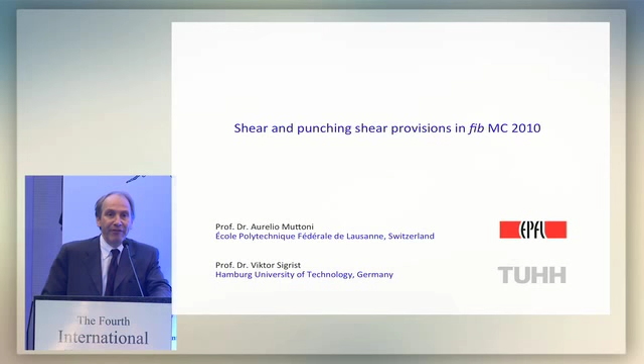A very short introduction about shear and punching shear provisions in the new model codes. Then Professor Viktor Sigrist from the Hamburg University of Technology, Germany, will continue on shear, and then I will talk a little bit about punching shear. Of course, the provisions for shear and punching shear are very much related. This is why we have combined our presentations.

We have many types of structures where shear problems can be governing. Typically, we know in a girder, in the web of a box girder or a girder with an open section, this is a typical region of our structure which has to be designed for shear. But there are also other structures which are perhaps a little bit less common, where shear can also be governing. Typically, a cut and cover tunnel, we have the slabs and the footings, where the loadings can be very important, and where we usually don't use shear reinforcement. And in these cases, shear can typically be governing. It has, or at least it has to be checked.

Another topic is what happens with flat slabs. Let's say slabs supported on columns. We know that in this particular structure, the shear forces are not parallel. We don't have a one-way slab. For instance, for the inner column, the shear forces are oriented toward the column. And in this case, we can have significant shear forces, and of course shear has to be checked. In this case, we speak about punching.

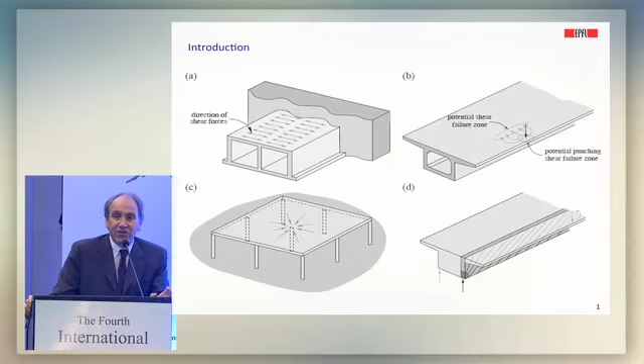We have then other cases where we can have both problems very related. Let's say, for instance, the deck slab of a bridge, which is subjected to concentrated loads. In this slab, we can have this zone between loading and the web, where shear can be governing, but we can also have the portion of the slab around the concentrated load, where we can potentially have a punching problem. Which means that when we speak about shear, we need to have provisions which are valid not only for this very classical case, but for all these cases. And these are just four examples. There are many other cases where we can have shear problems.

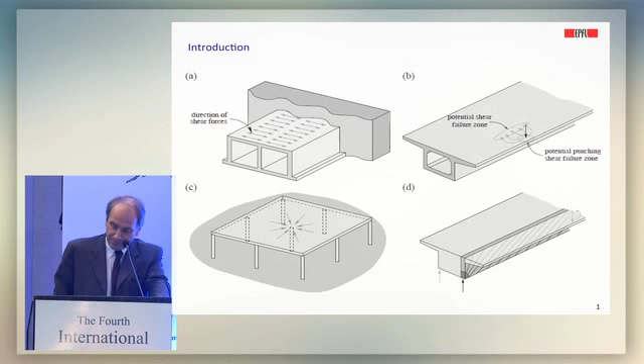We always have to make the distinction between shear of members without and with shear reinforcement. Why is this distinction important? The main reason is that the failure mode of members with and without shear reinforcement can be completely different. Here we can see a girder, let's say a beam, without stirrups, without shear reinforcement, and we have this typical failure mode, where we have a very high strain localization. Just before failure, one bending crack opens more than the others, and then it propagates into the compression zone, and at the end we have failure due to the large opening of this critical shear crack. This is what happens in beams without shear reinforcement.

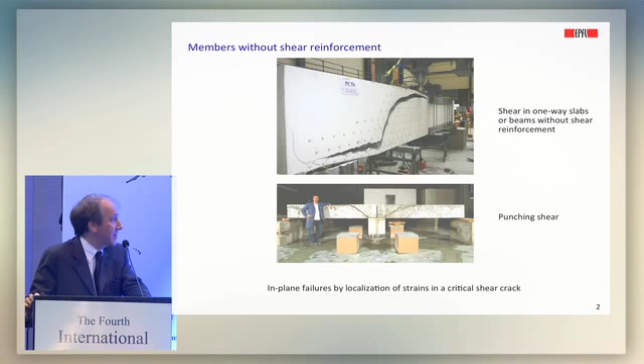When we talk about slabs under concentrated loads or supported on columns, we have a very similar failure mode. What you see here is a slab which was supported on this column, and it has been cut after failure. What you can see here is the typical punching cone. It's very similar to this, very much related to this critical shear crack. It means that we have very similar failure modes for shear and for punching, but we still have differences, which means that we have decided in the new model code to propose provisions for these two cases, which are similar but not exactly the same. I will explain later on why it is not possible to solve shear and punching shear in exactly the same way.

When we have members with shear reinforcement, then we have quite different failure modes. This is, for instance, a girder where we have a crushing of concrete in the web. We see that in this case the failure mode is very much related to crushing of concrete, and to concrete compression strength. When we have slabs and punching shear failures, the failure mode can be completely different. We have no analogy between the girders and the punching shear failure. This is very much related to the fact that we have here a distributed stress field and a distributed strain field, and at the end we have a large portion of the web where we can have failure of concrete.

In slabs submitted to concentrated loads, when we have punching, the situation is completely different because we have a localization of stresses and strains, which means that the failure zone is very much localized around the column. You can see from these two pictures that the situation is completely different, which means that we cannot use the same provisions for shear, let's say for one-way shear in slabs or for shear in girders, and punching shear in slabs.

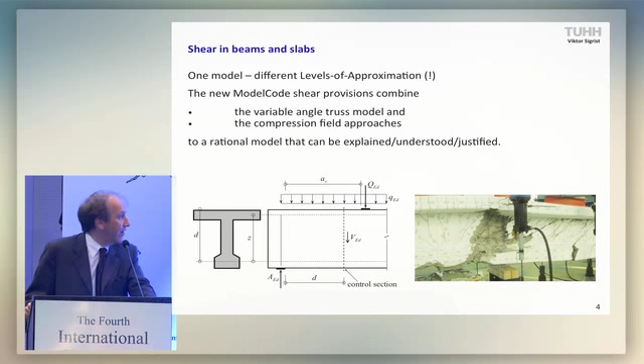We will switch now to the shear problem, and Professor Sigrist will continue our presentation, and I will then continue the presentation on punching. Yeah, thank you.

Ladies and gentlemen, I'd like to put one remark in front of my presentation. We have been a very small working party that worked on these problems, shear and punching shear. These have been five people basically: Aurelio Muttoni, Miguel Fernandez Ruiz, Evan Bentz from Toronto, Stephen Foster, and myself. This small party was involved in the basic work, and we also had some development within the period of work. That means, as you may have realized, there are improvements between the first draft of the code and the final version. So there are several different versions, so to say.

At the very end, we are quite happy, and as Aurelio Muttoni already mentioned, there still is a difference between the punching phenomena and the shear type of failure, and this can be seen and is still found in the code.

Okay, thank you. Now I'm with my subject here, shear in beams and slabs. What we did, we tried to bring different approaches together, which, as we heard earlier this morning, included combining our more European-based ideas of equilibrium models and plasticity-based models and bringing them closer together with what we know from Canada, for instance, the modified compression field approaches. So to have these two traditions closer together.

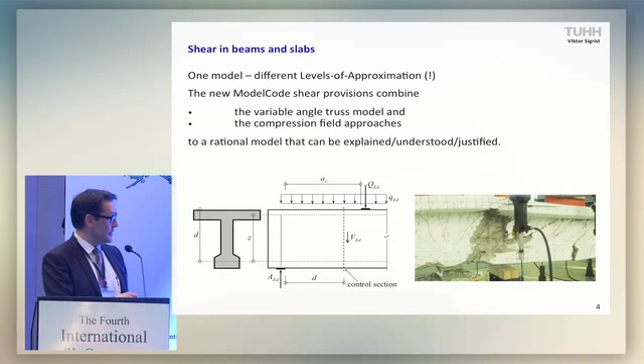So for shear, this started, for instance, with the definition of a control section, as you find right here on this picture: a control section at a fixed distance from the support line or a fixed distance from a load. We also brought up some rules on how to deal with uniformly distributed loads and point loads, which is important to do. As I mentioned before, we tried to found all our models on the classical things also.

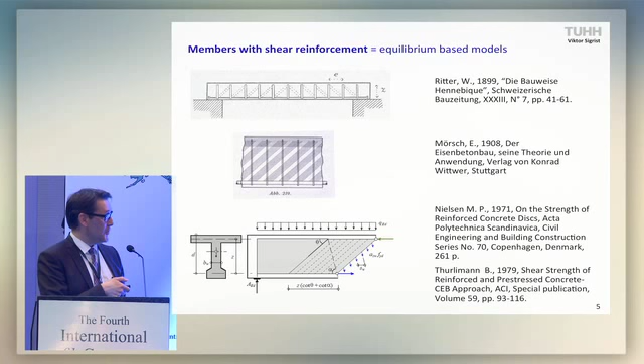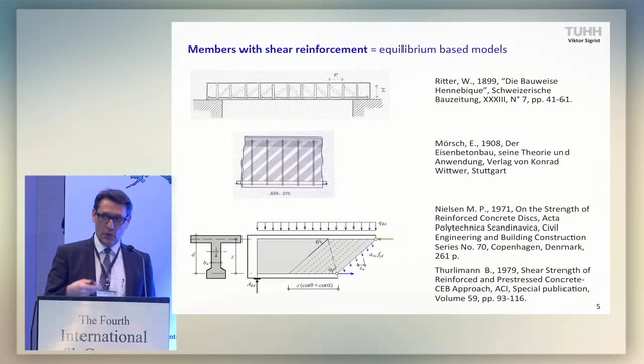The traditional models we know, brought up 115 years ago by Ritter, for instance, the classical truss model, were still in our mind. These models, which Ritter invented, were further developed, for instance, by Mörsch, but they were classical, which means with a fixed angle orientation for the struts. They were modified and improved in the late 60s and early 70s by Nielsen in Denmark and the Thürlimann group in Zurich in the course of the new developments within the context of plasticity. So the theory of plasticity gave a rational foundation to those more empirical findings from the older days. All these models are based on equilibrium, which is still the most fundamental thing we wanted to achieve also for the new models.

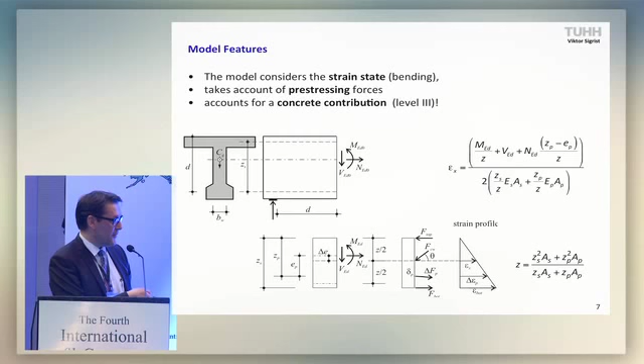And also from this linear strain profile, we have a definition for an inner lever arm, which is the z value, the distance between the compression and the tension forces. We also have a definition for the case where we have mixed reinforcement, meaning mild steel reinforcement and pre-stressing. So both of these expressions, epsilon x and z, come from the linear strain profile. There's nothing special. You can find it by just working through the equilibrium equations.

For the resistances, we have two criteria I mentioned before. Number one is basically the resistance provided by the stirrups. The very well-known equation coming from the truss model, which includes the amount of stirrups, this is the steel cross-section of the stirrups, and the yield strength, the yield limit of the stirrup steel.

And we have this web crushing criterion, which is exactly this type of failure where the concrete fails in compression in the inclined struts. Also quite well known from the truss model analogy, we have this kind of equation: fck divided by some safety factor, and the influence of the inclination, which is sine theta cos theta. But we have a reduction factor, as you all might know, similar to what you know. We have a reduction factor which, this is new, includes this strain effect, which is k epsilon, the first part here, and also includes the brittleness influence, which is this second part here in this equation.

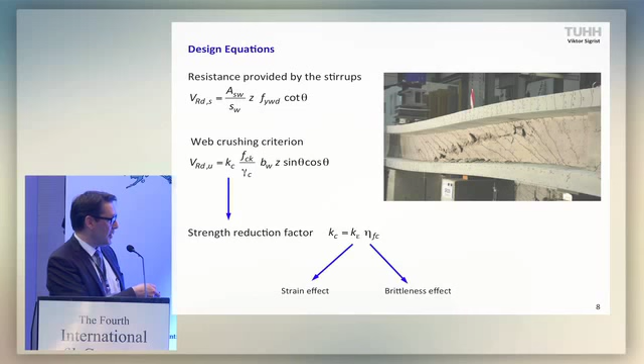On the other hand, we do have this brittleness effect, which is a proposal by Aurelio Muttoni quite some time ago, where he found that there, of course, is an influence on the brittleness with regard to the strength of the concrete, and that with this rather simple equation, the effect that the higher the strength, the more brittle the behavior can be captured. So these two effects together are part of this reduction factor, which reduces the strength in the struts.

As mentioned by Joost Walraven this morning, we do have several levels of approximation. We do have a low level, a first level, level 1, which is thought to be used for conception of structures, for first design, for a simple approach. And we always have those two things to differentiate: the theta min question, the minimum inclination of the struts, where we always have to choose between the minimum and the 45 degrees limit, and on the other hand, this reduction factor, just explained before.

For level 1, we do have fixed values of theta min, which is 25 degrees for pre-stressed members or 35 degrees for ordinarily reinforced members. And we do have a constant reduction factor, which is 0.55 times the brittleness influence, which ends up in a straightforward possibility for the design. It's very simple. It's rather on the safe side, but it's easy to apply. Level 2 is thought to be used for the detailed design or an assessment of a member.

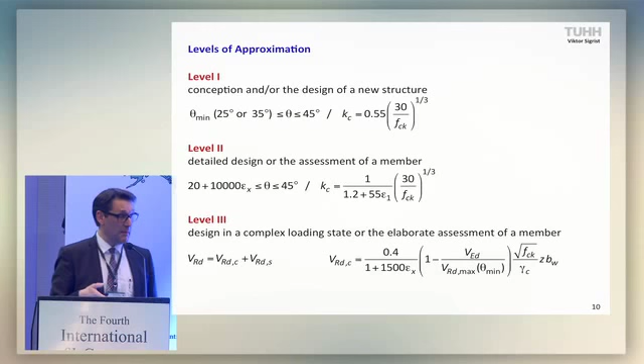Level 3, which is the highest level in the analytical world, so to say, is thought to be applied for the design of very complex loading states or an elaborate assessment of a member. We do have an additional contribution. As I mentioned before, this is the modified compression field part of the shear strength. We do have an additional VC term, which is a contribution coming from the concrete. This VC term is given here and can be calculated and is quite similar to what we will see later on for members without shear reinforcement.

To explain this further, we can probably go back to the diagram as shown before. We do have reinforcement ratio, we do have shear strength, and we can differentiate between design situations and assessment situations. In design, we enter such a diagram from the left, where VED, the shear force, is given. We don't work with diagrams, but it can be explained with the help of the diagrams. Then we select some theta value, indicated with this dotted line, and we choose some reinforcement ratio and some web width, for instance, and we end up with a certain amount of reinforcement that should be provided.

Completely different is the case of the assessment. We enter such a diagram from the bottom because the reinforcement is given, the geometry is given, and then there is some iterative procedure. You can't directly find the solution because the curves are not fixed anymore, because there is this strain influence, but at the very end we do find some solution on such a curve, which is drawn here in green. So these are two different cases to differentiate.

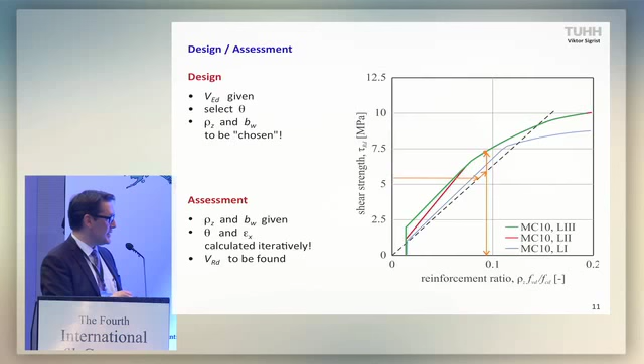I would skip this one and would go directly to the case of members without shear reinforcement. I mentioned before the models are similar, are related to each other, but are different, which is due to the fact that Aurelio Muttoni just mentioned that the failure phenomena are different. In literature, we do have several proposals how to deal with such things. For instance, there is also a proposal by Muttoni and Fernandez Ruiz, which is

based, and this is what we also included in our model, on the definition of a strain state. Number one, very important influence, the strain state. Again, this epsilon x I just mentioned before, as well as the size of the member, which is quite an important difference between reinforced members and members without reinforcement. We do have this size influence. Similarly is what we adopted or included in the code. We based the whole thing on a type of physical model, and again, the remark, it's a strain-based model.

We end up with this basic equation, the shear resistance due to concrete, it's only the concrete because there is no stirrup reinforcement, is a function of the square root of the strength, which is fck, square root of fck divided by some safety factor, and we do have this kv factor, which can be chosen. One kv we have already seen, which is the modified compression field part in the members with shear reinforcement, and two other kv factors we see right here for members without shear reinforcement.

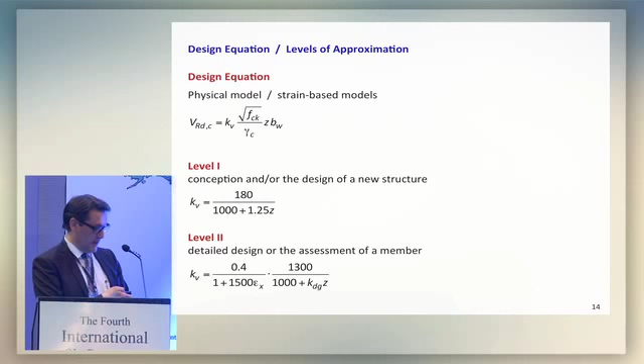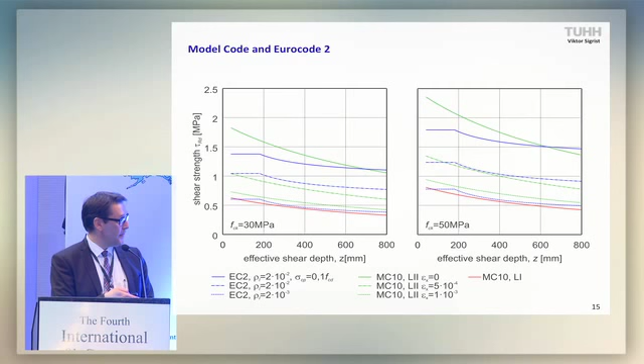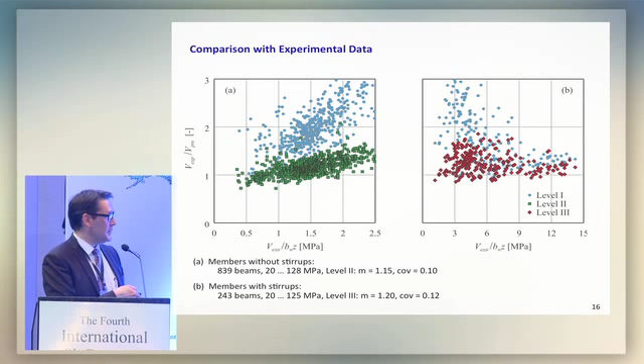So I also want to show you, to give you an idea, it's not only a theoretical work we did for the model code, we also did some quite comprehensive comparison with experimental data. And here you see for the members without shear reinforcement, we included some 800 and something beam results to compare, and different levels give different results. And for the members with shear reinforcement, we included some 250 or something beam results, and we do have this kind of comparison.

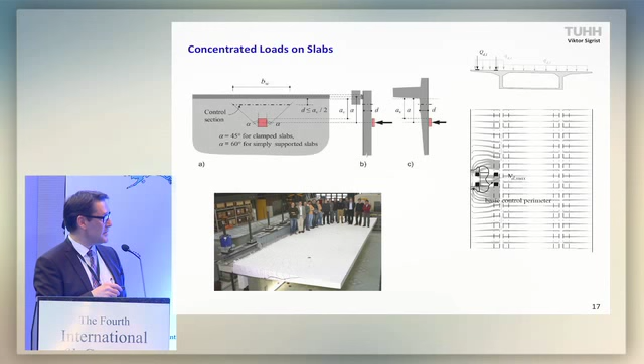One last slide from my side, and then I give over to Aurelio again. And Joost already mentioned it. For the first time, we do also have the chance to include the effect of concentrated load on slabs. It's a preliminary proposal, so to say, because there still is research going on in that field. It's quite complex, because it's not only a linear or whatever problem, but rather a lot of influences. But here, and you see Aurelio Muttoni's group in the lab in Lausanne, I guess, where they tested huge cantilever slabs of bridge type structures, and from such experiments we developed this first proposal to include this effect. So just to give you this information again. So this is it from my side, and I hand over to Aurelio again.

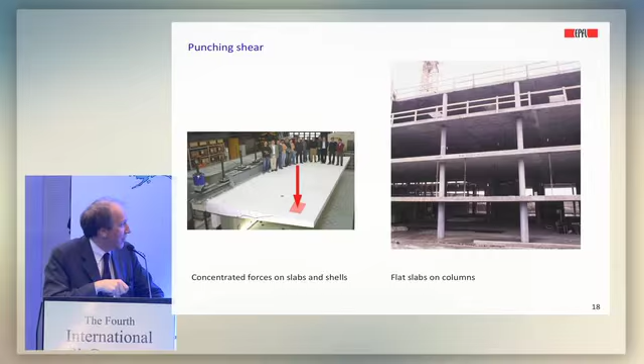Thank you very much, Viktor. Well, I will continue with the same picture. In fact, when we have the concentrated load near to the support, then we get this kind of shear failures. But when we move the concentrated load, which acts on a small area, towards the free edge, then we can potentially have a punching shear failure here in the slab. This is very much related to what we have in flat slabs. Let's say slabs with constant thickness supported on columns.

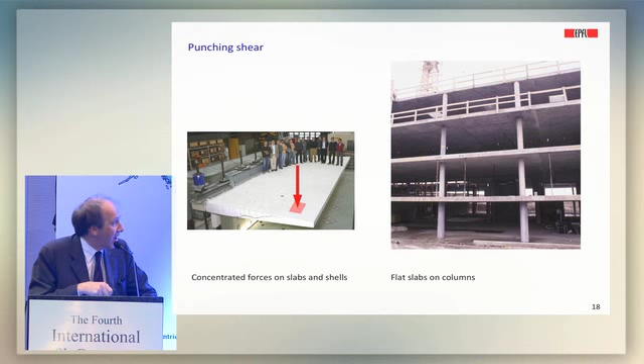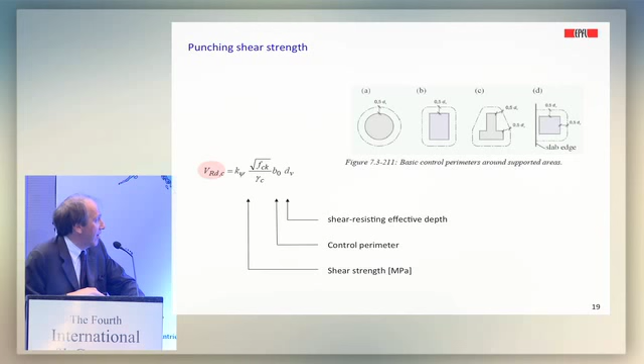The control perimeter, as I said, is located at 0.5 d from the edge of the column. This is quite different compared to Eurocode, as you can notice. It is similar to the ACI code. We have done a lot of investigation, and we have seen that this choice has many advantages. For instance, we can use exactly the same provisions for flat slabs and footings. If you don't have this assumption, for instance, like in Eurocode, we cannot use the same provisions. We have to adapt the punching shear provisions for footings. There are other advantages. We have not the time to discuss them this morning. There are other advantages choosing this location of the control perimeter.

When the loading and the geometry of the slab are completely symmetric, then we can take the full length of the control perimeter around the column. When we have unbalanced moment or when we have non-symmetrical cases, we have to reduce the length of the control perimeter. There are quite simple provisions in the new Model Code in order to calculate this reduced perimeter. We have also, for this case, very similar provisions in other codes, but we have tried to simplify them, and we have found that this proposal is much simpler compared to, for instance, what we have in the ACI code or in Eurocode. We have introduced the concept of shear resisting effective depth of the slab. This is important only when we have a variation of the thickness of the slab in the shear critical zone. For instance, such a wall or such a slab which is suspended by a tie, it is clear that only this portion here of the slab will

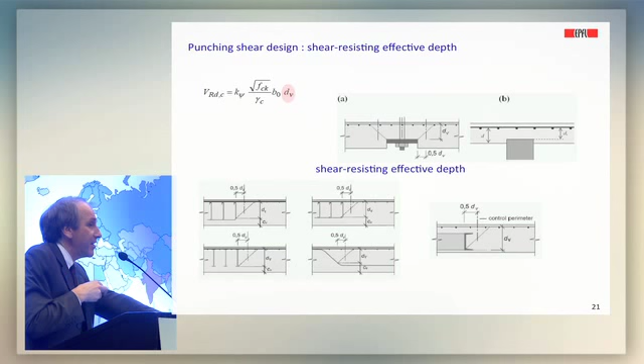provides quite good results. The new idea integrated in this provision is that the shear force which can be carried by this theoretical compression strut can be reduced by the presence of a shear crack which starts at the very beginning as a bending crack.

And this is, in fact, the main idea. We have something which is very similar to the approach for beams without shear reinforcement. There we have assumed that we have a crack opening, and we assume that we have a strain which produces this crack opening, and we assume that the shear strength is directly related to the opening of this shear crack, at the very beginning of the bending crack, and then it propagates into the compression strut as a shear crack.

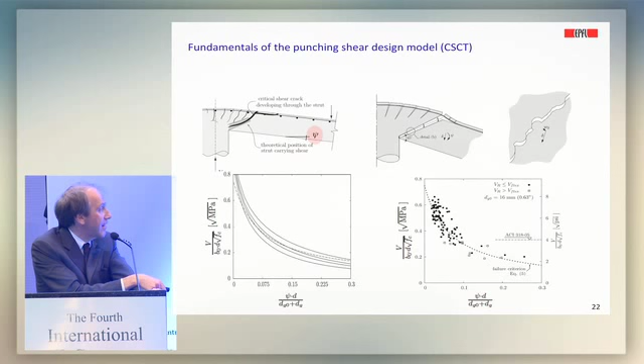Here on the right-hand side of the slide, you can see a comparison with test results. There are many test results which have been carried out in many countries in the last 50 years, and this comparison shows that the theoretical calculation fits quite well the experimental results, which means that for engineering calculation, for designing, or for assessment of an existing structure, we can take such a curve where we describe the punching shear strength as a function of the product of psi and d. Please note that we have combined psi, which is related to a strain in the governing region, in the critical region of the slab, and d, which is the size of the slab, as already described by Professor Sigrist.

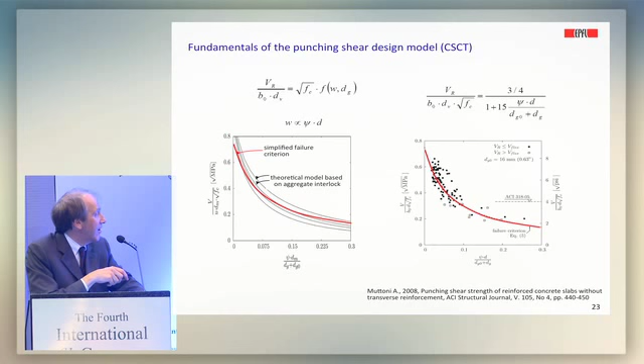In these problems where we have a localization of strains, we always have a size effect, which means that if we double the thickness of the slab, we will get a punching shear strength which is less than double that of the previous slab. This is what we call the size effect. This is again the comparison with the test results. We have a small scatter which we can take into account using a characteristic curve here, assuming that we don't have more than 5% of the tests which give lower results than what we have proposed in this equation here. And this equation here is exactly what we can find in the punching shear provisions of Model Code 2010. It is the same equation.

Now, when we want to calculate the punching shear strength, the punching shear capacity of a slab, we need to know the thickness. This is well known, but we also need to know the rotation psi, because we have a strain-based model. And for this case here, it is a little bit more complicated than in shear. Please note that in shear we have elastic behavior of reinforcement.

It is usually not the case in punching of flat slabs, because we have very large concentrations of moment around the column, so that at the ultimate limit state, in many cases, we have yielding of reinforcement, plastification of reinforcement, which means that the stiffness of the slab here is not constant. At the very beginning, reinforcement is elastic, but as soon as we have yielding of reinforcement, we reduce the stiffness of the slab, which means that rotation psi will increase much more than the load, or let's say the shear force. This is why we have to take into account this nonlinear curve here for the calculation of psi.

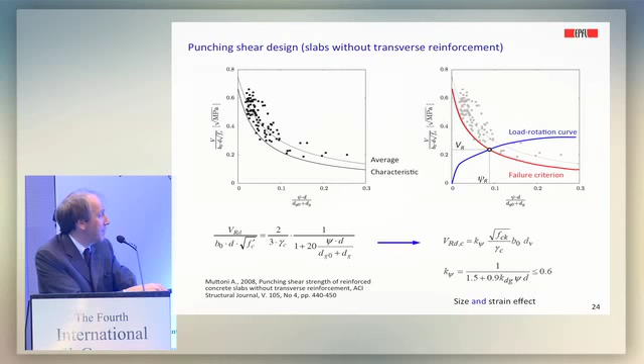It is possible to calculate rotation psi, doing some assumptions and taking into account a nonlinear moment curvature relationship. We have seen that this is very interesting for research purposes, but it would be too complicated for engineering work, and this is why we have simplified the curves which we can calculate using this model here. We have simplified these curves by this equation here. The parameters are derived directly from the theoretical model.

We can find an explanation in this paper here, which has been published in 2008 in the ACI Structural Journal, which is the background document to the punching shear provisions. You can see in this paper that we can get this equation just taking these parameters here from the theoretical model and then simplifying this relationship here. Let's say this is the punching shear strength. This is the red curve, which is given by this parameter psi. And in order to calculate rotation psi, we need to know this curve here, which is given by this equation here.

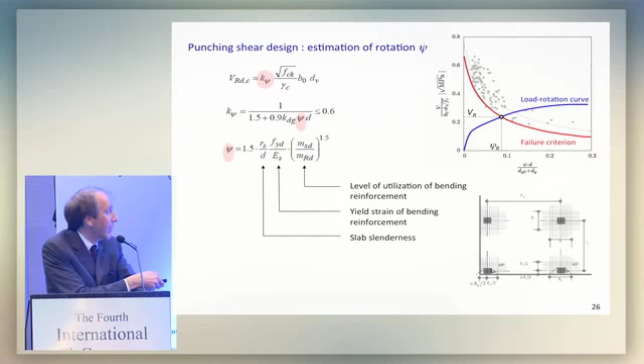There are some proposals for using the level of approximation approach. The level of approximation approach is very useful for punching because in many cases punching is not governing. Let's say, for instance, in bridge slabs, if the thickness is enough, in many cases punching is not governing, which means that it is very useful to have a very simple tool and to perform a very simple calculation. There are also similar situations in buildings when, for the choice of the thickness of the slab, deflections are governing, or vibrations are governing, or other criteria are governing. And the size of the column is also enough because other criteria are governing, for instance, normal force capacity of the column. Then we have, in any case, sufficient punching shear strength, which means that in these cases it is very useful to have a very simplified approach.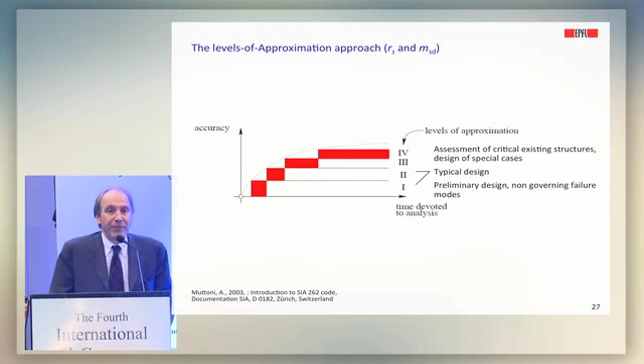And this is what we call level 1. This is usually used when the punching is not governing or for preliminary design. When it is governing, then it is useful to have a more refined calculation tool, and in some cases it is even necessary to do a more refined calculation. For instance, when we want to assess the strength of an existing structure. It has been described many times during the last days. It is very useful to have more refined calculation tools.

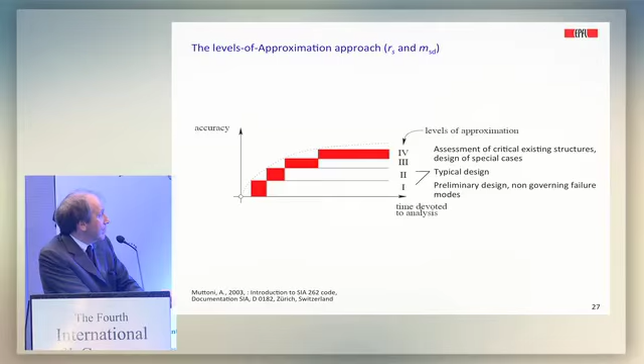You see the level of approximation approach on this slide here for the two parameters which are usually a little bit more difficult to calculate for flat slabs. The bending strength, the bending capacity, of course, is easy to calculate. This is known. The statical depth is also known. The only two parameters which are a little bit more complicated are rs. rs is the distance between the axis of the column and the point where the radial bending moments are 0, which is the contraflexure point. This can be calculated, for instance, with a linear finite element analysis, which is usually used for designing bending reinforcement. But in order to allow a simple calculation without doing a bending analysis of the slab, we propose this very simple relationship. It is a simplification of the reality, of course. We assume that the distance between the axis of a column and the point of contraflexure is 0.22 times this span L.

At level 1, we can also assume, and this is always on the safe side, that all the reinforcement on the support strip is yielding, which means that this ratio here is 1. It's what we assume at level 1. It is on the safe side, of course. If the strength is not sufficient, we can perform a more refined calculation.

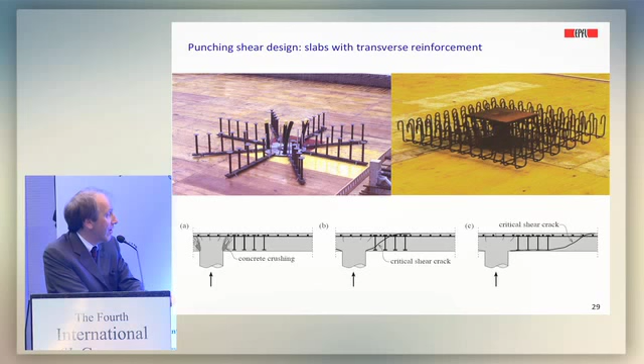The second one would be an opening of a punching cone with activation of the punching shear reinforcement. And the last one would be punching outside the punching shear reinforcement. As I said, we have to check all these 3 potential failure modes. The first one is very simple to calculate. We just use exactly the same equation for punching capacity without shear reinforcement, and we multiply these strengths here by

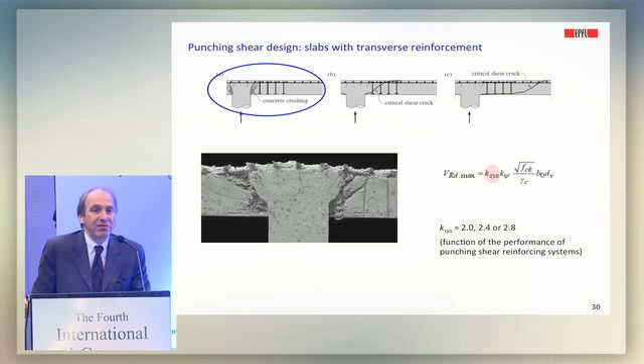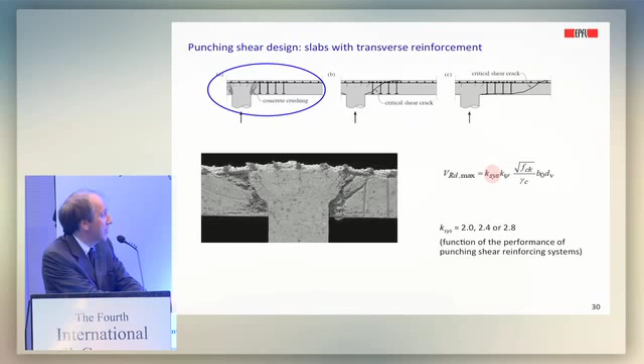a parameter k_sys, which is a function of the performance of the punching shear reinforcement. There are punching shear reinforcements, for instance shear studs, which are very efficient because we have a very efficient anchorage. There are other reinforcements which are less efficient, and we can take into account this effect by assuming different values of this parameter here.

For the second failure mode, it is a punching with an opening of this critical shear crack and an activation of punching shear reinforcement. For this case, we assume that the shear force can be carried by a combination of 2 different mechanisms. The first one would be the concrete capacity, which is still possible, and the second one, of course, is the activation of the punching shear reinforcement. For the component related to this compression strut, we use exactly the same equation, exactly the same approach as I have shown for slabs without shear reinforcement.

We just add the component of the punching shear reinforcement, and this is perhaps something which is very new. We have seen in many tests that if the slab is very stiff, we have relatively small crack openings just before failure, which means that we cannot activate yield strength in the punching shear reinforcement. We have based our calculation on a very physical model which allows us to calculate the stress in the punching shear reinforcement as a function of rotation psi.

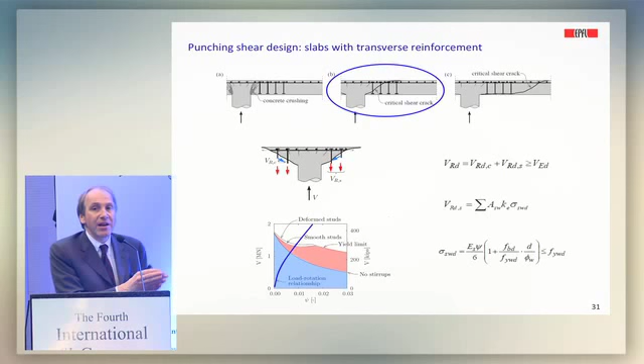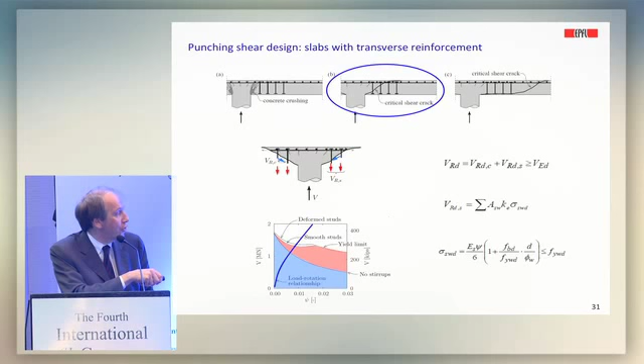It is logical. If we increase the rotation, we increase the opening of the critical shear crack, which means that we can activate more force in the punching shear reinforcement. But of course, if we increase the crack opening, we also reduce the component of shear force which is carried by concrete. It is exactly the blue curve which I have shown before.

For punching outside the shear reinforcement, this calculation is important in order to know how wide the zone in the slab where we need punching shear reinforcement has to be chosen. For this calculation, the principle is exactly the same as for punching without shear reinforcement, with the only difference that we reduce the effective statical depth.

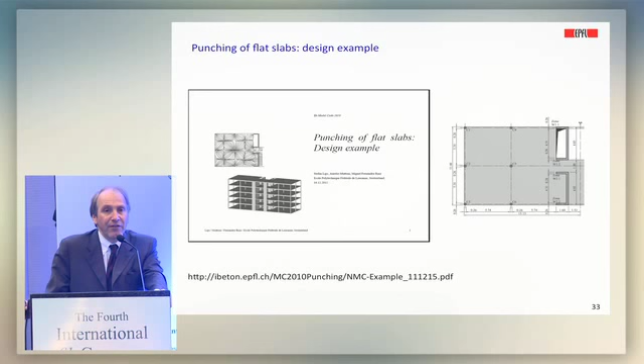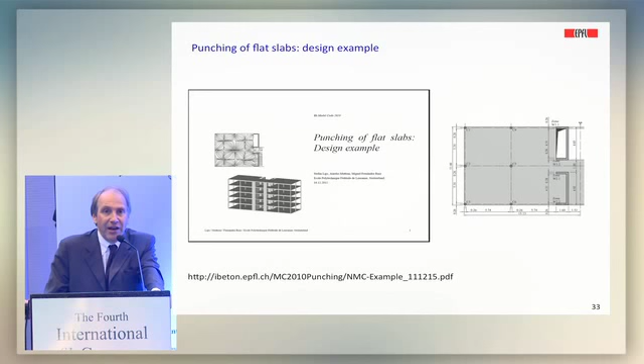You have perhaps seen that there are some points which are a little bit different compared to other codes, for instance ACI codes or Eurocode. There we use now models which are much more physical, and in order to help engineers understand better how they have to perform calculations, we have produced a document which can be downloaded from this site here, where we explain how the punching shear calculation can be done for a very simple case, but a very

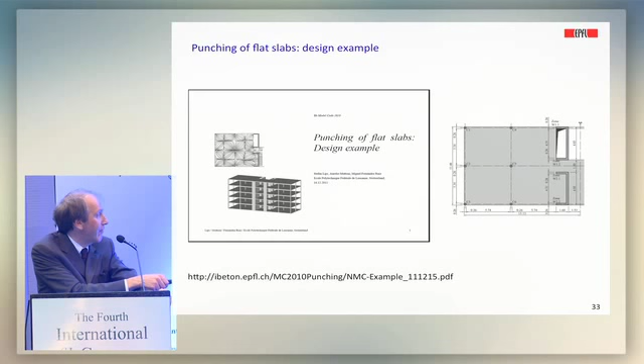common flat slab. We start with level 1. The idea, as I have shown, is that the calculation is very simple. We calculate the length of the control perimeter, the position of the point of contraflexure. We estimate rotation psi in a very safe manner, and then we calculate this reduction factor, which takes into account the size effect and the strain effect, so that we can calculate very easily the punching shear strength.

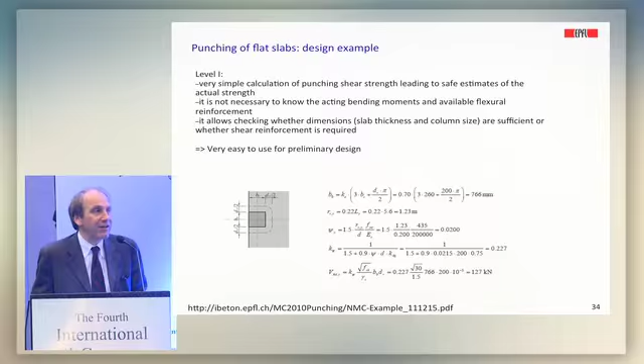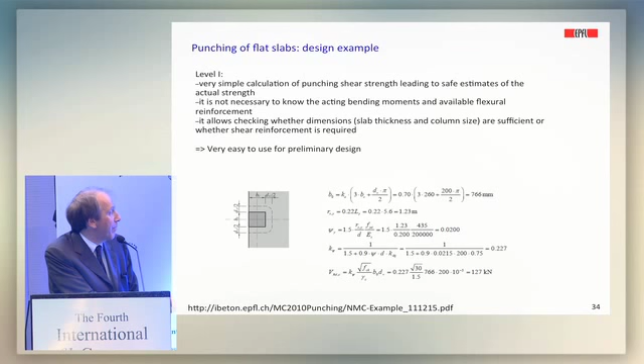If it is not sufficient, then we can go to level 2, and the main idea of the level of approximation approach is that we keep as much as possible parts of the calculation done at level 1. This is very important. It is not necessary to repeat all the calculation. Many parameters here can be kept. We have just to increase the precision of some important parameters, like, for instance, what you can see here.

I have here now in red what is new, in green what has been performed at level 1, and you can see that there are just 2 parameters which can be improved. For instance, the first one is taking into account the level of strain in the bending reinforcement, which means that we have to estimate the average bending moment in the support strip. We provide an equation in order to estimate this average bending moment, which allows us to estimate rotation psi with a much better precision.

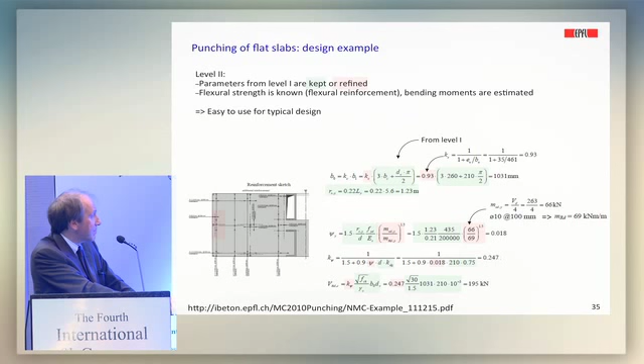We put this new rotation psi into this equation here, and then we get very quickly this reduction factor k psi. And also here you can see that some parts of this equation, some parameters are kept from the previous level of approximation. We can do exactly the same at level 3.

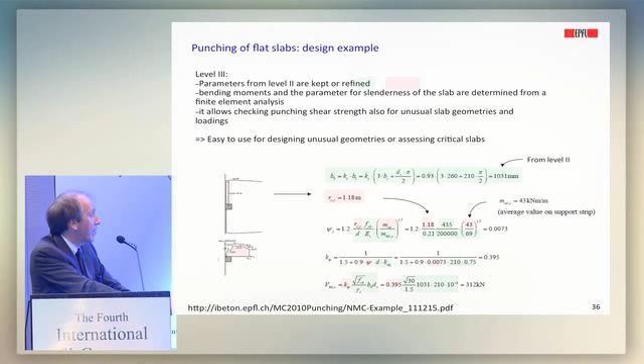For instance, we can perform an elastic finite element calculation of the slab, and then we can calculate very easily the position. We know very easily where the bending moment is 0, which is given by this parameter r here. And we can also calculate the average bending moment on the support strip, which is this value here. If we put these two new values in the old equations, we get very easily a more precise rotation psi, a more precise parameter k psi, and a more precise strength and punching shear capacity.

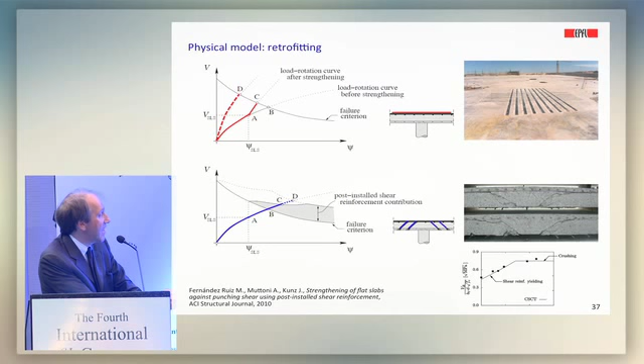As you have seen, perhaps, the very new approach is that we based our provisions on a very physical model. We don't use anymore the empirical equations which have been used, for instance, for Eurocode, and this has many advantages. For instance, we can use exactly the same approach, exactly the same provisions for cases which are even not foreseen in the code. Where, for instance, we have used exactly the same principle for slabs which are retrofitted using carbon fibers or using post-installed shear reinforcement. I have not the time this morning to explain how it works, but it's very logical, and it is based completely on the same provisions you can find in the model code.

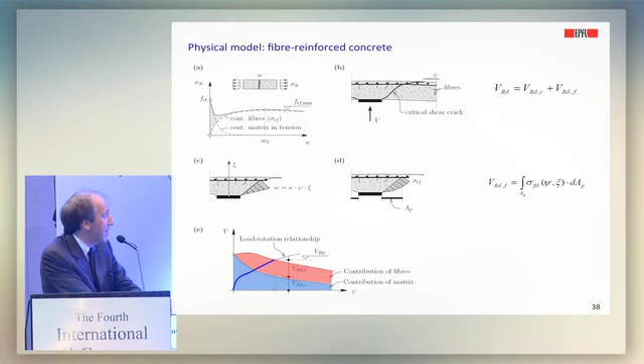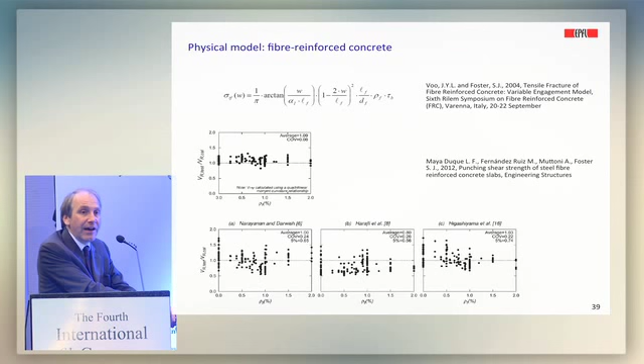We have used also exactly the same approach for fiber concrete. In this case, we use exactly the same approach as in slabs with shear reinforcement. We have the component of the shear force which is carried by concrete, and you have just to add the part of the shear force which can be carried by the fibers. We have used, for instance, the provisions which we can find in the model code, combining the activation of the fibers with this physical model developed by Professor Steve Foster and his co-workers. It would be also possible to use the method for fiber concrete, which will be explained by Professor Di Prisco this afternoon here in Mumbai.

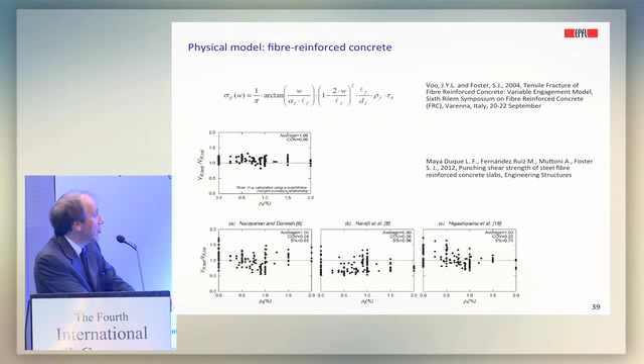And if we combine both models, we get excellent comparison with test results. This is using the model code provisions, and this is using empirical models which can be found in literature. As you can see, the scatter is much less, which means that this model is also very useful for fiber reinforced concrete.

The last case I would like to just present very quickly. There has been a presentation by Dr. Fernandez Tuesday on the differences between isolated elements. As you know, all the code provisions are calibrated on laboratory tests, and many of the laboratory tests are performed on isolated test specimens. We have seen that there is a very important influence of membrane action in actual flat slabs.

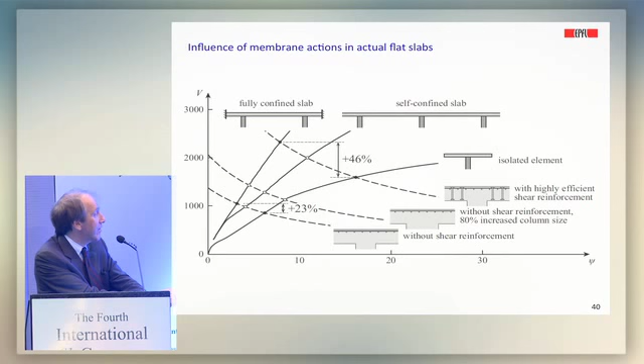We have used exactly the same model and taking into account the influence of membrane forces on the load rotation curve. As you can see in this diagram here, if we take into account the full slab around the column, we increase the stiffness, which means that we reduce rotation psi, we reduce the crack opening, and we increase the punching shear capacity accordingly. This increase depends, of course, very much on the different parameters. There are situations where this increase is not very large, but there are other cases where this increase can be very important.

I would like to conclude my presentation. As you have seen, the new provisions for shear and for punching shear are grounded on consistent mechanical models. This is very important in our opinion, but they have also been checked against extensive experimental data. All around the world we have found very interesting tests which we have used in order to perform these comparisons. The accuracy of the mechanical parameters can be progressively refined in various levels of approximation, and this is very important in order to be able to perform very simple calculations, but also with exactly the same model, very refined calculations, which are very important for assessment of existing structures.

And another point which is also very important, in my opinion, these provisions can be easily adapted to unusual cases, providing the designer with a clear understanding of the structural behavior.

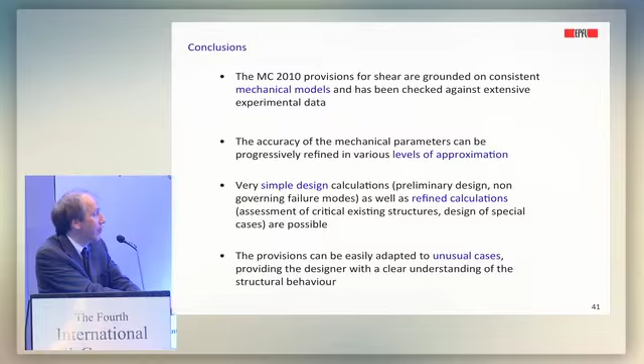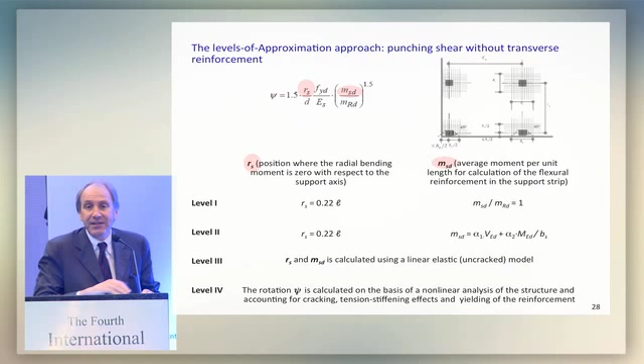The definition of the average. This is very important. The definition of the average moment on the support strip here, which you can see in this equation here, has to take into account also the influence of torsional moments. But what we do usually for classical flat slabs with a more or less regular geometry, we perform a calculation in one direction, parallel to the reinforcement, and in the other direction, also parallel to the other layer of reinforcement. And for common cases, the torsional moment on this cross section here are neglected.

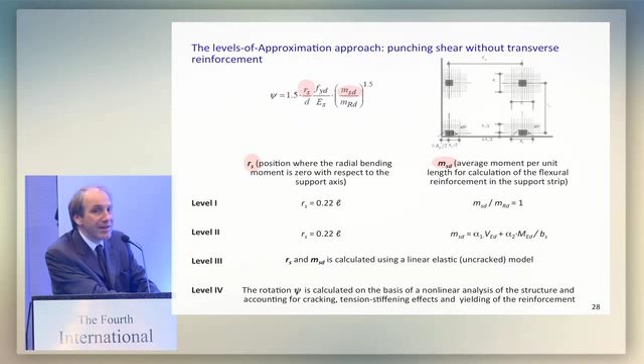They can be neglected for inner column. This is also the case for edge column. The only case where torsional moment can play a major role are the corner columns. In this case here, I fully agree with you. We have to take into account the torsional moments. This is also one reason why we have preferred to give a simplification equation in order to estimate in a very simple way the average moment on the strip.

Just one very quick comment. It's very relevant, an absolutely rational approach, an excellent approach actually the code has taken. To bring out its importance, in this city we had a collapse of an 8-story building, which was a flat slab building, and it actually collapsed. It's a building in an estate called Shiv Sagar in Worli, and it actually collapsed due to punching shear failure. The whole building.

This is a very important remark. We have also done comparisons of this model with real collapses, and this is also very important in order to see if there are not hidden additional strengths which we neglect with this approach. And we have seen that we are able to reproduce what happened in real collapses with the model. I would be very interested to have more details on this collapse, because we are very interested to analyze these cases.

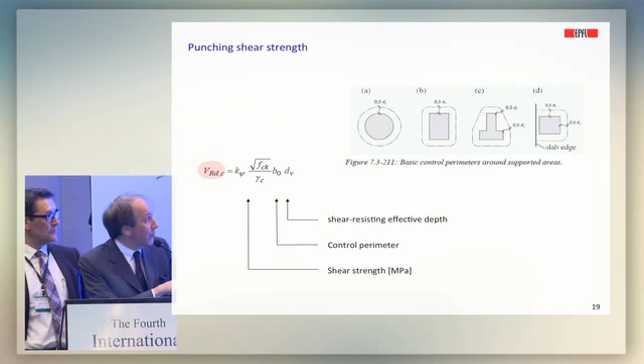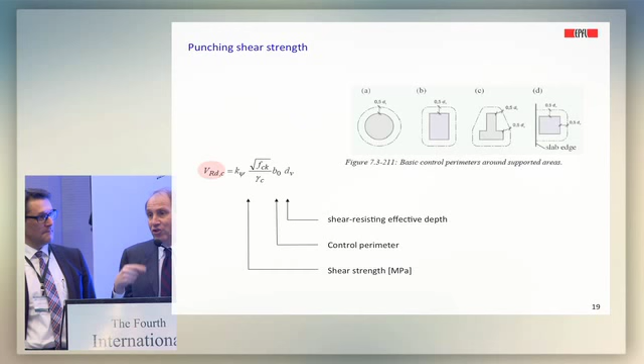If we have, and this is the most common case, ducts which are parallel, which are tangential to the column, but first of all, we should try to avoid this situation, of course. But if we have, let's say a duct here, and this is perhaps more important for one-way shear, then what we can do is to use exactly the same approach here, and we can reduce the shear-resisting effective depth accordingly. Yeah. You are right, we have some rules in the Swiss code in order to take into account this effect. It has to be done.

It has perhaps to be said that the provisions we have in the Swiss code have been adapted in the last version of 2013. Adapted from the model code, from the new model code. I think it's probably the first code which uses the model code provisions.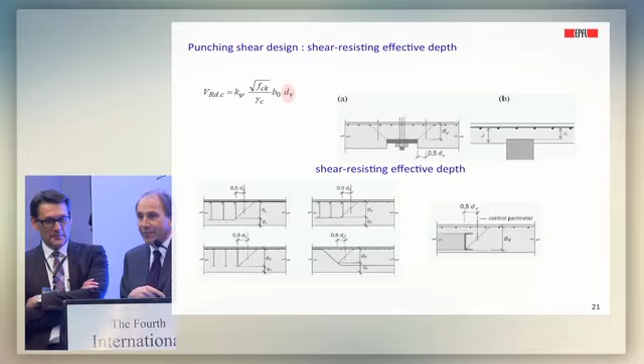Thank you. You mentioned the effect of aggregate size on the shear capacity.

Usually, whatever I see, everything is based on 20 millimeters nominal maximum size of aggregates. Now, many times for some reasons, we have to produce concrete with 6 millimeters or 12 millimeters or 10 millimeters aggregates. Of course, the strength remains as we have designated. Will it really reduce the shear capacity in those cases?

Yes, there are many tests which show that for usual concrete strengths, let's say less than 50-60 megapascal, the size of the aggregate is important on the shear which can be carried across the critical shear crack, and there are many tests which confirm this hypothesis. It has also to be said, when we increase the concrete strengths higher than 60 megapascal, then one can observe that the cracks don't go anymore around the aggregates. They break the aggregates, and in this case, the influence of the aggregate size is much smaller.

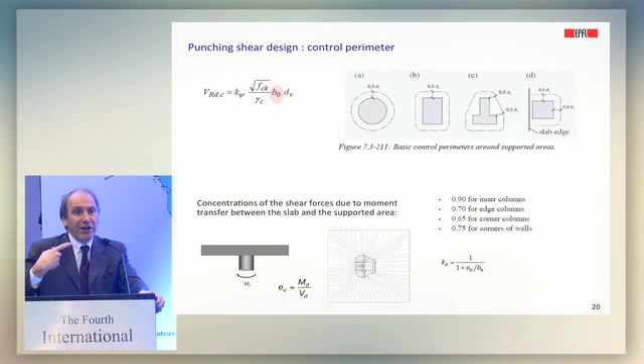Thank you. This is a very, very important remark. Let's say there are two phenomena which influence the punching shear strengths, and I think that in the past the provisions for Eurocode has been adapted empirically in order to take into account two very different phenomena. The first one, if you increase the size of the column, of course, you increase the perimeter, the control perimeter, and you increase punching shear strength. This is very logical. Then there is another phenomenon. If you increase the size of the column, you increase the punching shear strength, which means that you also increase rotation. Which means that if you increase the size of the column, at failure you have a critical shear crack which are more open than in the case of a slab with a very small column. And this explains why, if you increase the size of the column, the increase in punching shear strength is less than the increase in the control perimeter.

I don't know, it's a little bit complicated to explain, but we have done many calculations which clearly show that we have to take into account these different influences on the punching shear strength. And what has been done many years ago for the old model code, for model code 90, which was at that time the basis for the current Eurocode, at that time it has been chosen empirically. The position of the control perimeter has been chosen empirically in order to take into account these two phenomena, which means that it works quite good for common sizes of column, which has been tested in laboratory. It works quite good for symmetrical cases. It works quite good for inner columns.

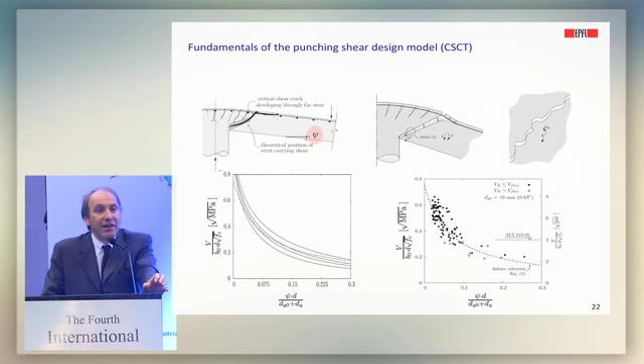But as soon as you have other situations, which you also can find in practice, which has never been tested experimentally, then it can be not on the safe side. For instance, there is a research done by Professor Paul Regan in London some years ago, which shows that a recent punching shear test with very small column doesn't work with the provisions of Eurocode, because at that time when the calibration has been made, these tests were unknown.

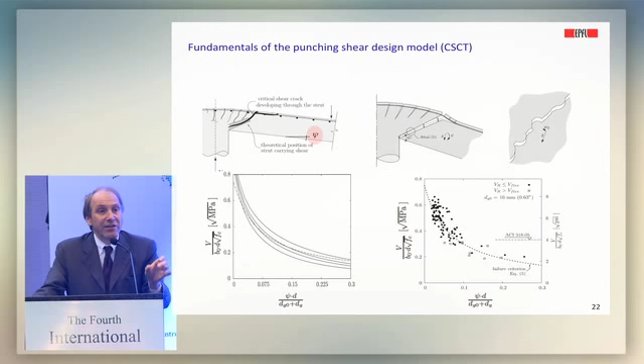There are other situations where the choice of a control perimeter at 2D from the edge of the column doesn't work. This is the case of footings, or the case of flat slabs, where we have a significant load in the zone of the column. It can be an external load, or it can be the deviation force of a curved tendon. The comparison to test results show that in these situations, the perimeter located at 2D according to Eurocode doesn't work. There are some provisions which has been proposed for the Eurocode, but these corrections are still empirical, and we came to the conclusion that it is much better to have this physical model which takes into account correctly the two different phenomena.

Thank you. You're welcome. I have two questions. One is in case of pile caps, where if you have a large column and the column is overlapping the pile, what happens to the punching shear? And another question is in case for columns with capitals. Where should we check the punching shear? Yes. Very, very interesting question.

The first case, when we have pile caps, what changes? We have concentrated forces from the piles, which act very near to the loaded area, which is the area of the column, which means that the distribution of the shear forces is in most cases not constant. We have to take into account this situation. But unfortunately, we don't have provisions in the model code. I think that in the list of Professor Walraven of problems which need to be investigated in future, this is a classical, very interesting topic which should be investigated. But I'm quite confident that we can use the same model with small adaptation, taking into account the reduction of the control perimeter. In fact, it is very similar to a footing.

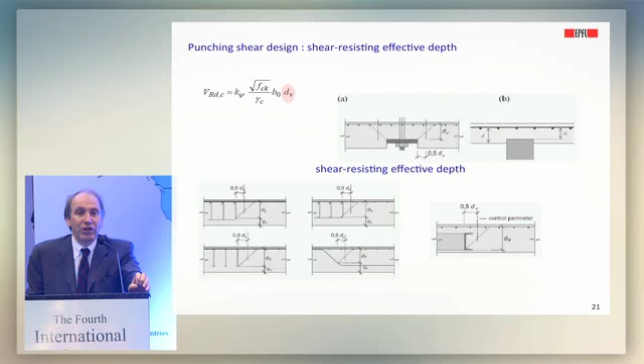Then the second case, what happens when we have capitals, external capitals? We have to perform different calculations, assuming potentially different control sections. The idea is that we should, unfortunately, I don't have the picture, but we have to perform, for instance, a calculation outside the capital, and other calculations inside the capital. If you are inside the capital, we increase the shear resisting effective depth. We increase this value here, but we reduce the control perimeter, of course. And then we have to search for the position of the governing control perimeter, which gives the smallest punching shear capacity. Thank you.

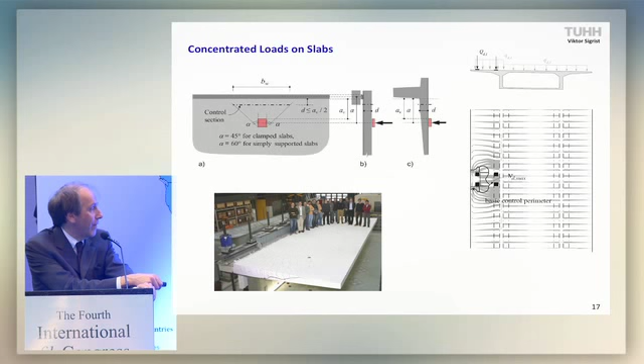And if the load is at the corner, not in the symmetric position, very much eccentric on the corner, for instance at the tip at the corner, on the cantilever, yes. A load which is applied here would be very similar to a corner column, which means that in this case we have to check punching shear. We have to check punching shear strength of a corner column, and then we can use without any limitation the provisions for corner columns. I didn't have the time this morning to explain what happens in edge columns and corner columns, but we can use exactly the same model with just a little bit different definition of the control perimeter. But this is clearly described in the new model code.

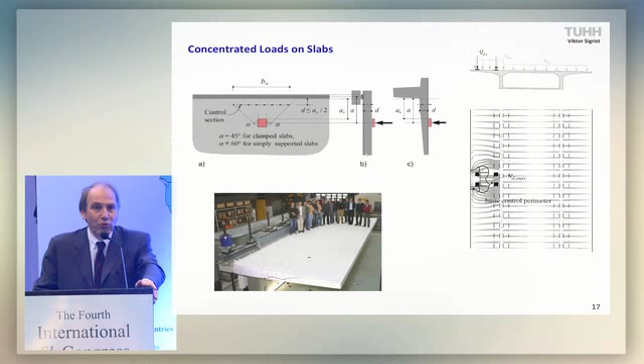How do you judge the fixity of the clamp boundary condition? Same the box girder. How do you judge? Well, this is a good question, but this is related to analysis, this is related to calculation of internal forces. We speak here only on the calculation of shear capacity. Of course, I fully agree with you. The calculation of the internal forces, this is another problem. We have to take into account the full cross section of the box girder, and also the position of the loads and related to supports. It can be quite complicated, but this is related to analysis.

Sir, I'm coming back to the question asked by the earlier gentleman, because in practical situations it does arise that sometimes the column line area, when superimposed with the supporting piles below, there is a pile cap. Through the pile cap, then the piles, there is a partial overlap of the load. In that case, we understand the answer you have given, that more work is required to find out if we are going to use the shear model or punching shear model for that calculation.

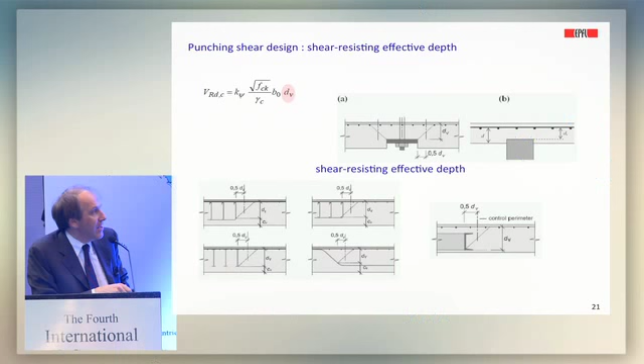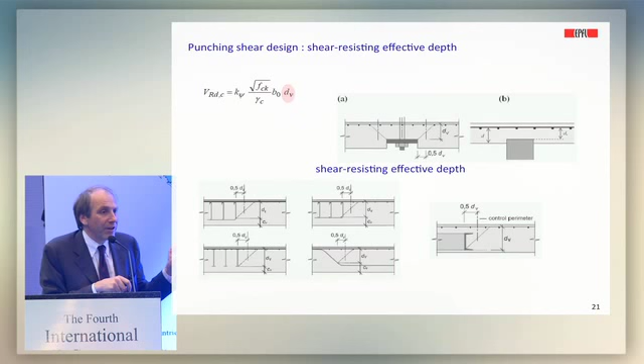Good question. The definition of the statical depth is usually the distance between the average position of the bending reinforcement to the compression side. In the case of shear, we have to reduce it in these cases. The definition is that the shear resisting effective depth, I don't remember exactly the wording in the provisions of Model Code, is defined as the distance between the average position of bending reinforcement and level of support. You see, for instance, in this case here, we assume that there is no friction between the concrete and the steel plate, which means that we have to assume that the support of the slab is here.

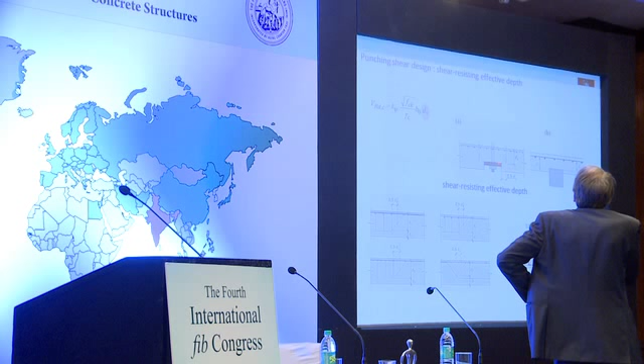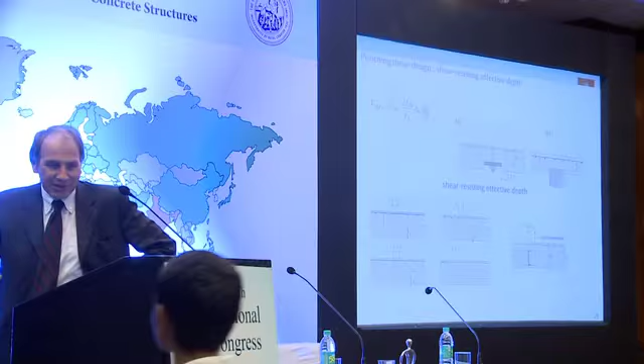Excuse me, I was actually questioning about the shear in case of a girder, particularly pre-stressed girders. You didn't understand the question, sorry. So, just to come to the short end, hopefully.

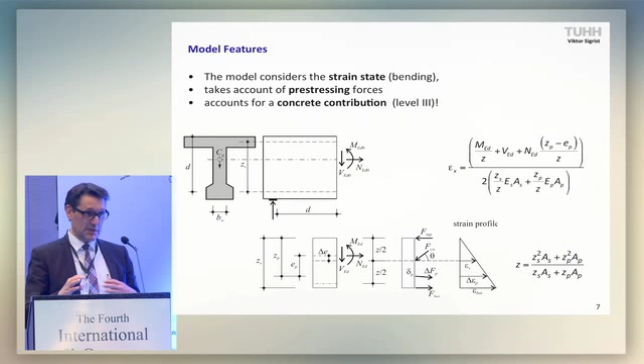There we normally, as already mentioned just now, assume the effective depth as the distance from the compression chord to the tension chord, which is all the same for ordinary structures. We have to reduce it in cases where a substantial portion of the tension force is carried by pre-stressing, where we do have some effects, which is accounted for in this equation, which is given in the code. So this is the short answer for a rather complicated situation.